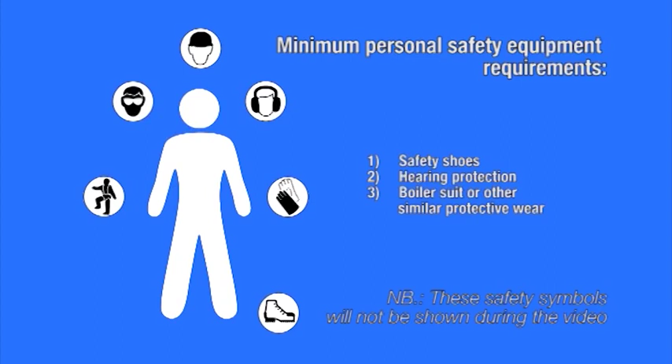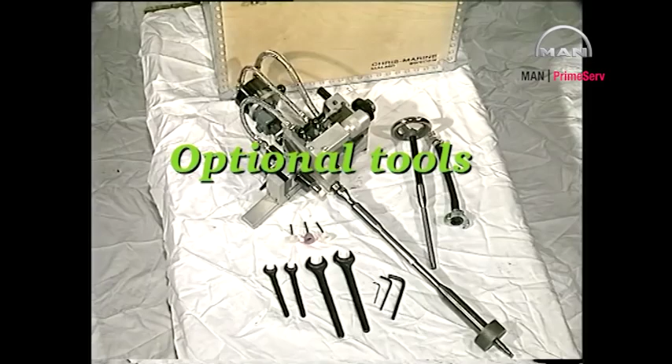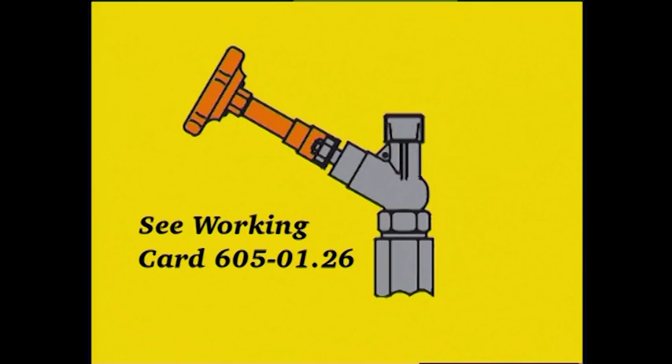Remove the scavenge air sleeve and the safety valve. For instructions regarding the overhauling of the safety valve, please see work card 605/01.25. The procedure for overhauling the indicator valve can be seen on work card 605/01.26.

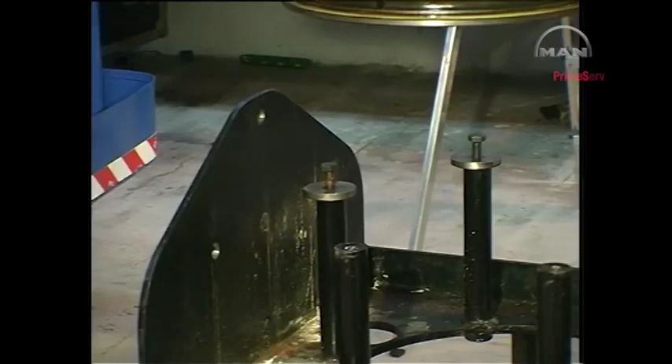Land the cylinder head on the work table. Make sure that the valve spindle supports have been mounted on the underside of the table. Remove the cylinder head lifting tool. Screw the cylinder head firmly to the work table.

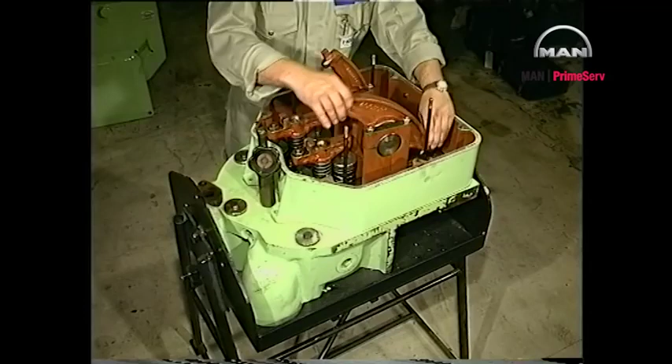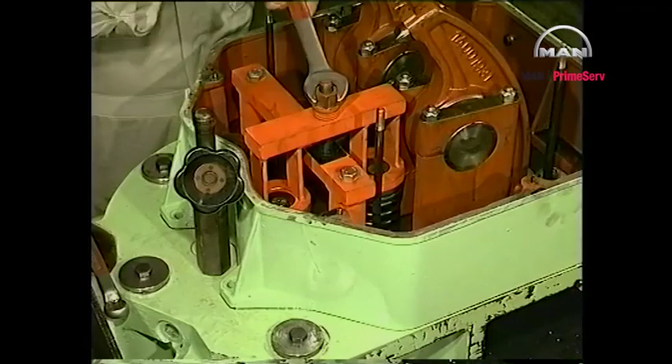Remove and discard the gasket. Remove the valve bridges and mount the tool for compressing the valve springs above either the two inlet valves or the two exhaust valves. Tighten the nut to compress the springs and then remove the cone rings.

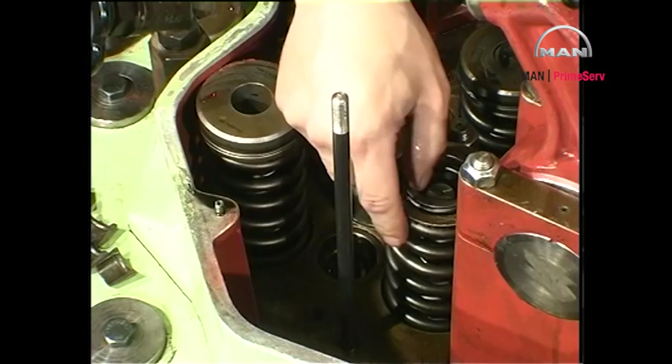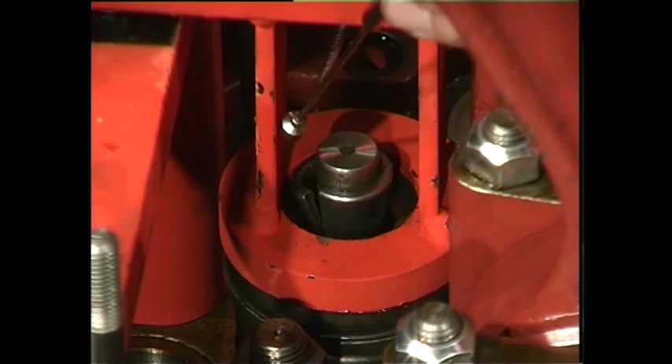Loosen the nut and remove the compressing tool. Remove the valve rotators and the springs. For instructions regarding the inspection and overhaul of the valve rotators, see work card 605/01.15. Remove the cone rings, valve rotators and springs from the other set of valve spindles in the same way.

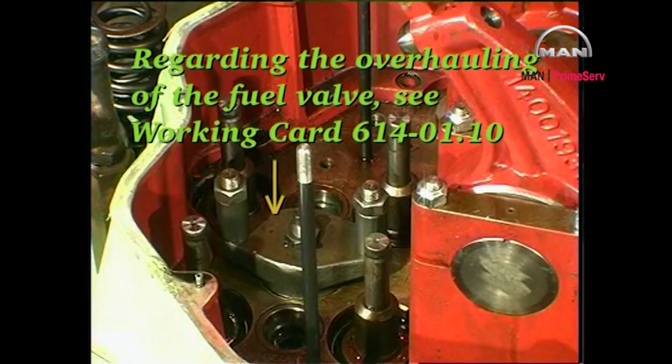Regarding the overhauling of the fuel valve, see work card 614/01.10.

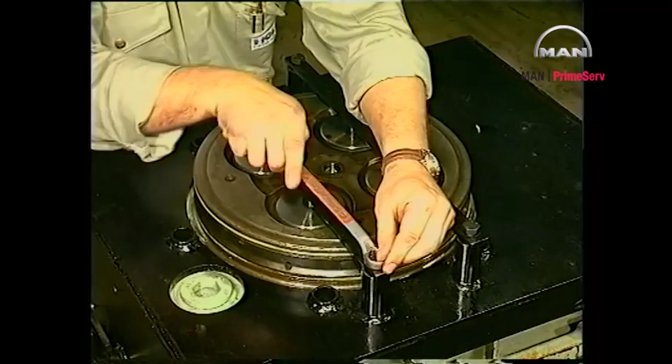Turn the cylinder head upside down and remove the valve spindle supports. To ensure that they can be rematched correctly, provide the spindles and cylinder head with numbers.

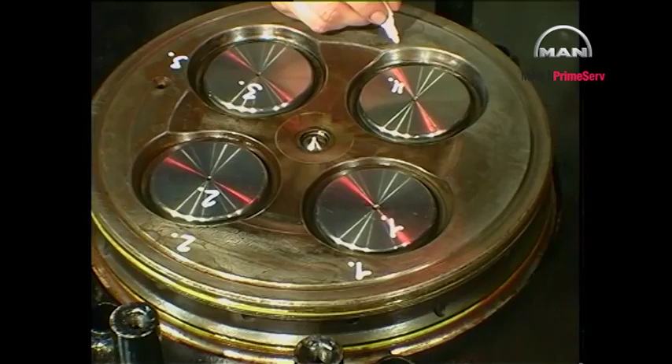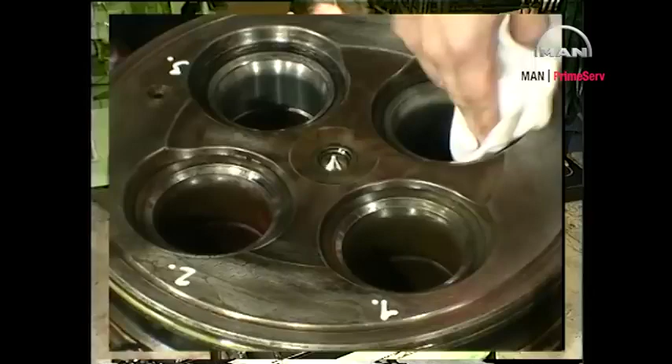Remove the valve spindles. Clean and check the condition of the valve seats and valve spindles. If the seats and spindles are badly burnt, recondition them. See work card 605/01.10.

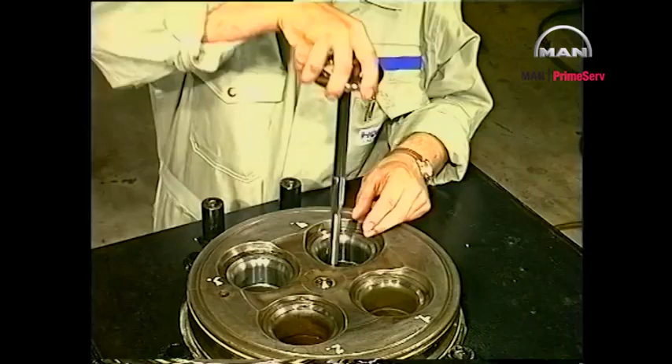Clean the valve guides with the special tool delivered with the grinding machine. Mount the grinding machine and grind the valve seats following the instructions of the grinding machine supplier.

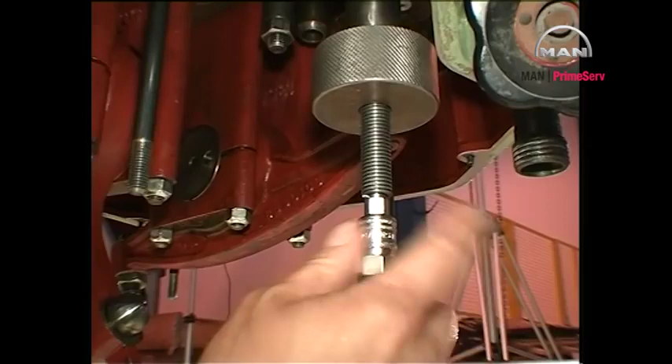Grind the valve spindles in a turning lathe following the instructions of the grinding machine supplier.

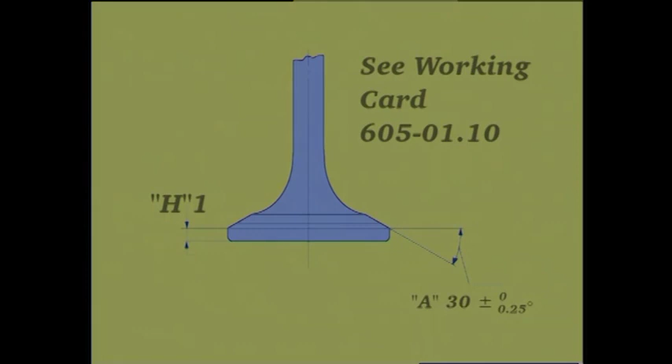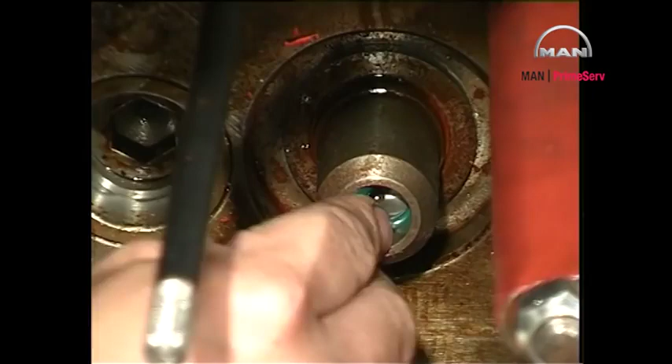Remove and discard the O-rings from the valve guides. To ensure the correct functioning of the valve guides, make sure that the diameters do not exceed the maximum limit. Insert a valve spindle to facilitate the mounting of new O-rings. Insert new O-rings using another spindle to press the O-rings completely into the groove.

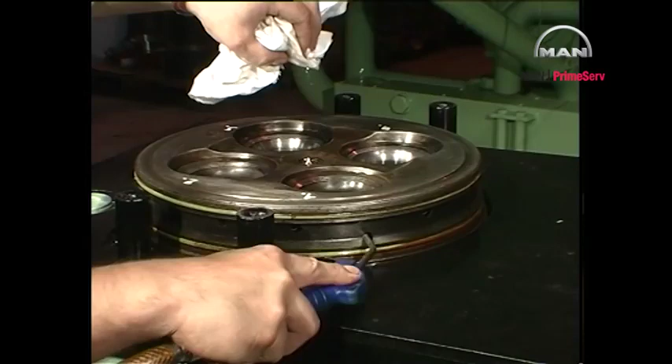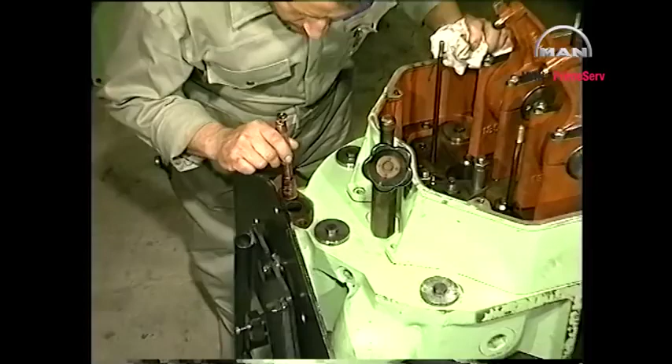Check the cooling water inlet bores and remove any deposits. Turn the cylinder head around and check the cooling water outlet. Pour water into the cooling water outlet and ensure that water flows from all the inlet bores in the bottom of the cylinder head. If necessary, clean and flush the bores.

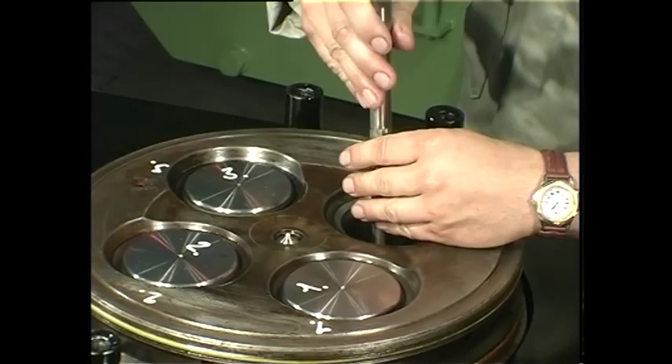Mount the inlet and exhaust valve spindles in the reverse order to the dismounting. Make sure that height H2 does not exceed the maximum limit. Remove the valve spindle supports.

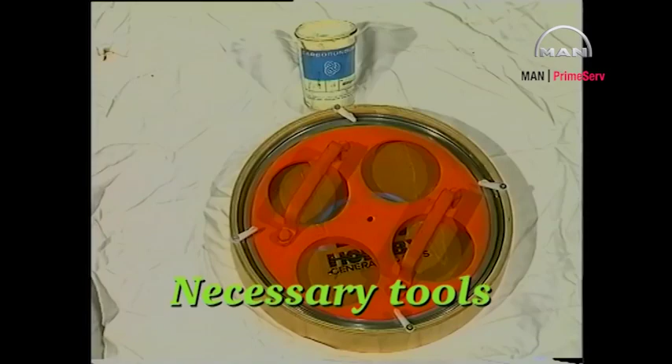Apply grinding paste to the sealing surface of the cylinder head. Move the grinding tool back and forth, lifting it from time to time so that the grinding compound is evenly distributed. After grinding, carefully clean the cylinder head. Measure and record distance Z so that it can be used for reference purposes when remounting the cylinder head.

Mount the valve bridges and remove the securing screws. Mount the cylinder head lifting tool and lift the cylinder head.

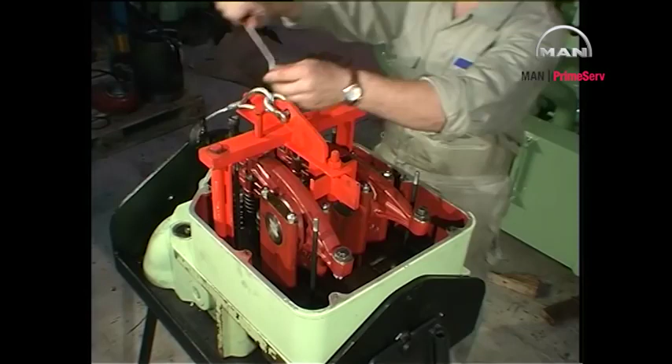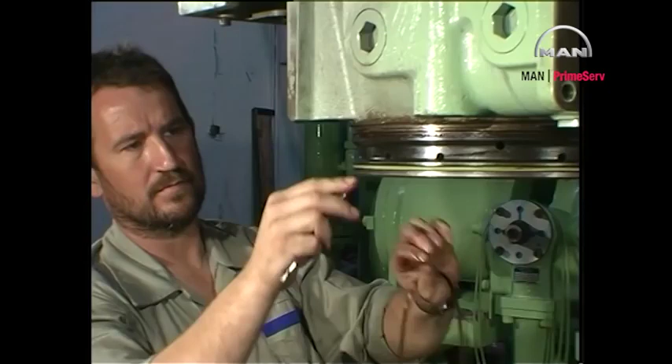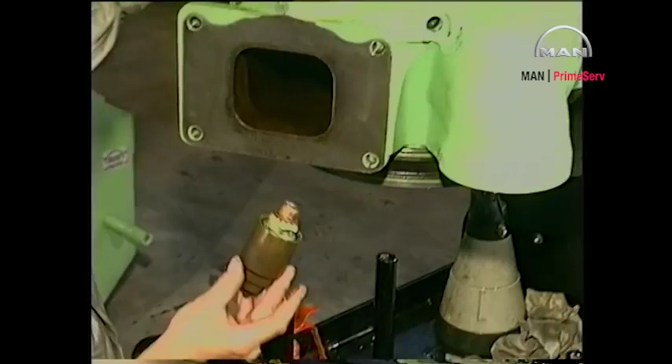Remove and discard the O-rings. Clean the O-ring grooves using emery cloth to remove any deposits. Make sure that the cylinder head sealing surfaces are clean and undamaged. Lubricate new O-rings with oil and mount them in the grooves. Lubricate the safety valve with Molykote or a similar product and screw it into the cylinder head.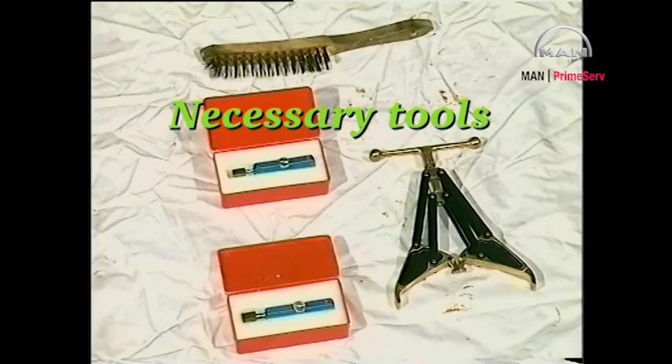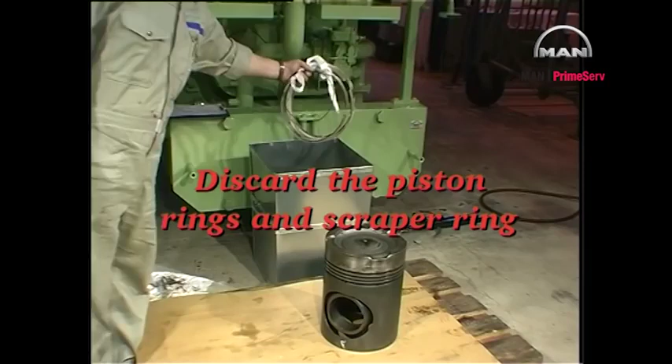Remove and discard the piston rings and the scraper ring. Clean any deposits off the piston. It is recommended that a piece of old piston ring be used to clean the piston ring grooves.

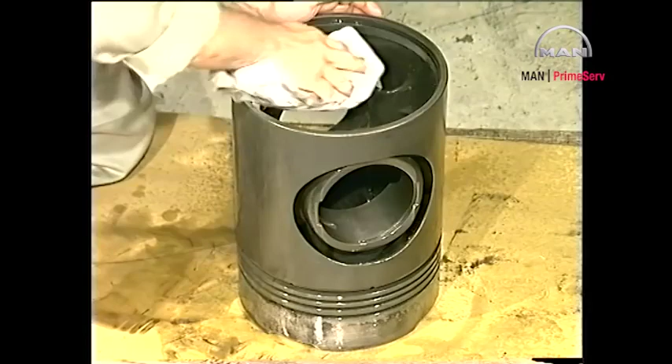Clean off any deposits from the inside of the piston. Check the piston ring grooves and scraper ring groove for wear. The piston must be scrapped if the wear limit line on the testing mandrel is exceeded.

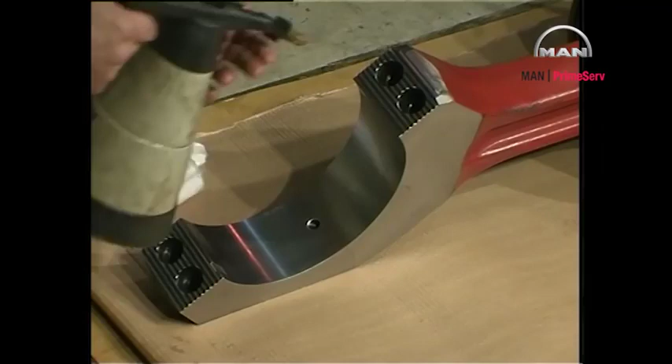Clean all machined surfaces of the connecting rod and bearing cap. Clean the serrated joint faces and threaded holes with a volatile solvent and then blow dry with compressed air. Check the serrated joint faces for wear marks, pitting, cracks, etc.

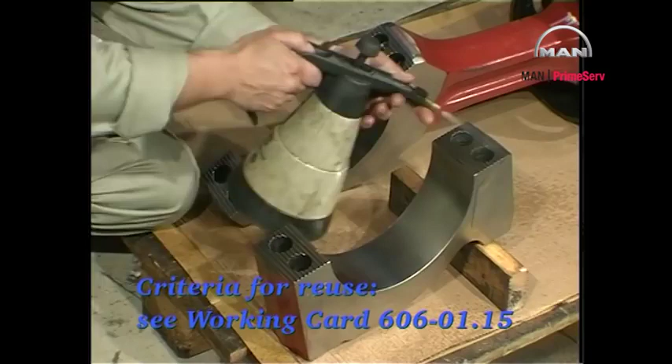Refer to work card 606/01.15 for possible rectification and reuse criteria. Enter observations in the connecting rod inspection report.

Clean the threads of the screws or the studs and check them for seizures. Lubricate the threads with Molykote or a similar product and check that the screws or the studs can be screwed fully home by hand. Take great care that the lubricant does not come into contact with the joint faces of the bearing. Also check for seizures or pitting on the contact surface of the screw heads.

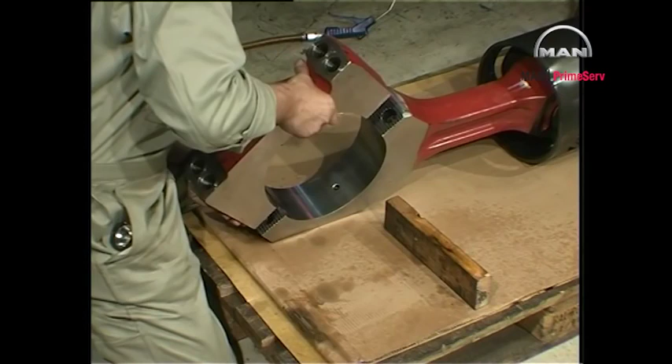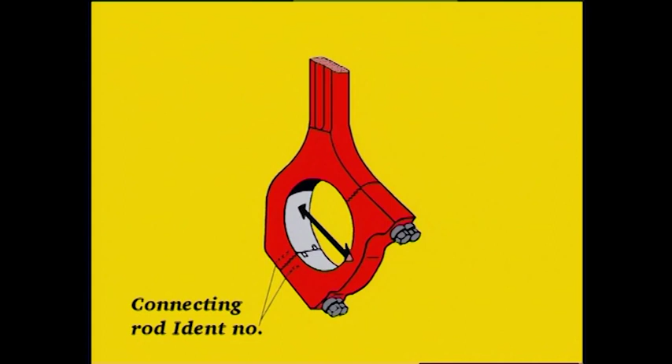Assemble the bearing without bearing shells. Make sure that the identification numbers on the connecting rod and those on the bearing cap are the same. Hand tighten the bearing assembly.

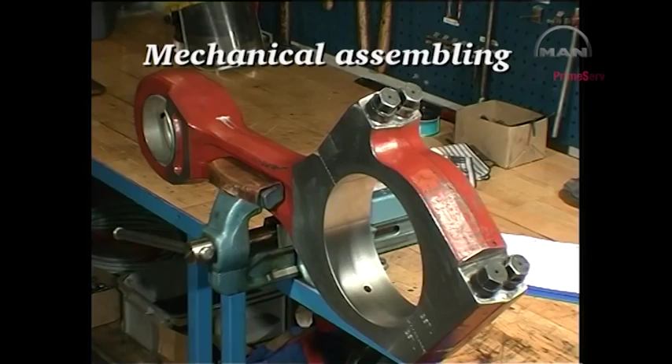The big end bearing must be tightened according to the prescribed tightening procedure before measuring the diameters.

Adjust the torque spanner to 400 Newton meters. Using an initial torque of 400 Newton meters, tighten the screws in the tightening sequence shown.

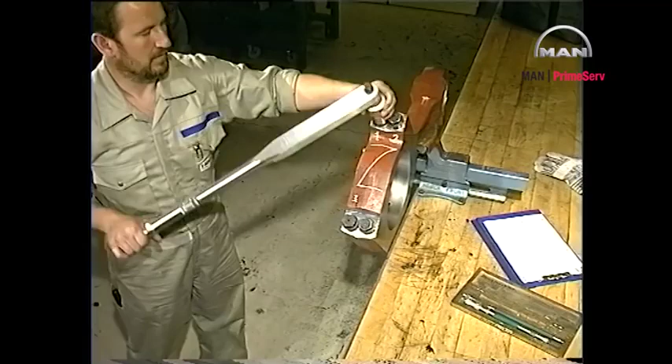Retighten the screws in the same tightening sequence, still using a torque of 400 Newton meters. Make marks on the 4 screws and the connecting rod with a felt-tipped pen.

Tighten the screws in the same tightening sequence through a 60-degree angle until the marks on the screws and those on the connecting rod coincide in the radial direction.

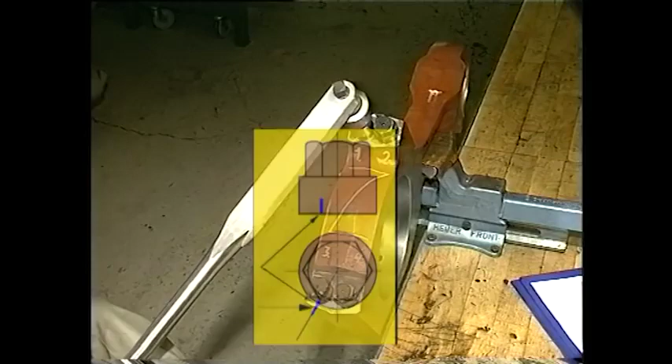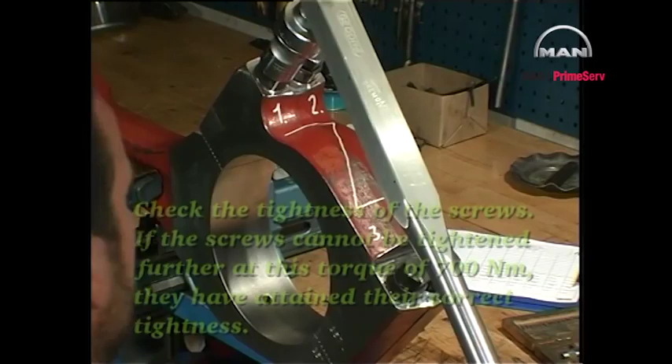Adjust the torque spanner to 700 Newton meters. Check the tightness of the screws. If the screws cannot be tightened further at this torque of 700 Newton meters, they have attained the correct tightness.

The big end bearing must be tightened according to the prescribed tightening procedure before measuring the diameters. Clean all joint faces and mount the hydraulic tools. Make sure that all the parts engage correctly.

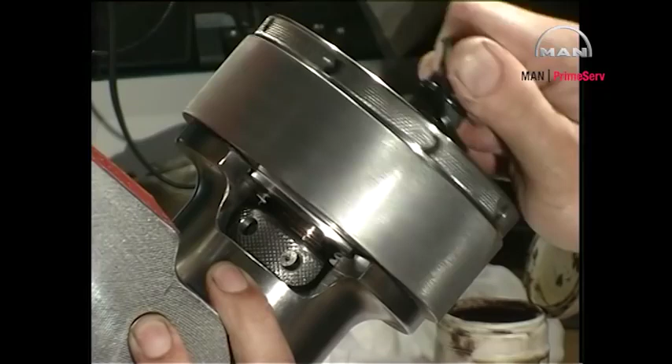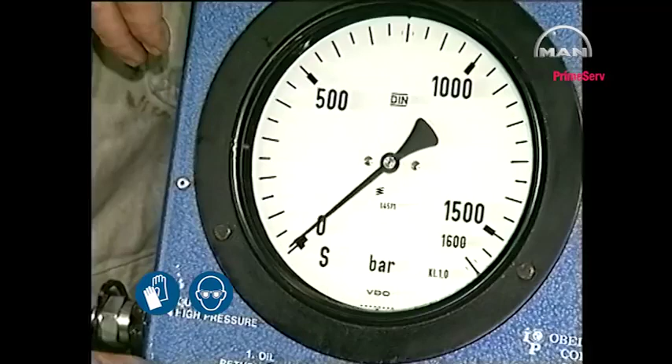Connect the hydraulic tools to the high pressure pump. Vent the system if necessary and increase the oil pressure to the prescribed value.

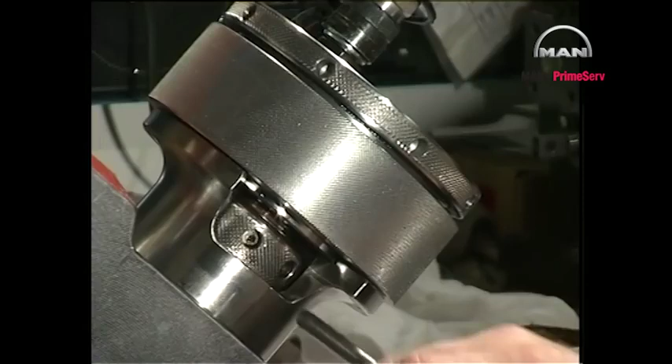Tighten the nuts with a tommy bar. Relieve the system of pressure and remove the hydraulic tools.

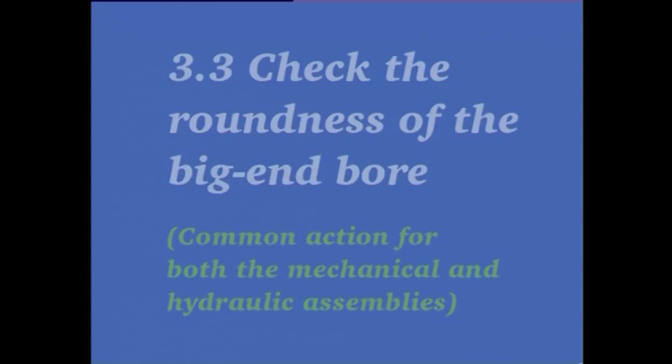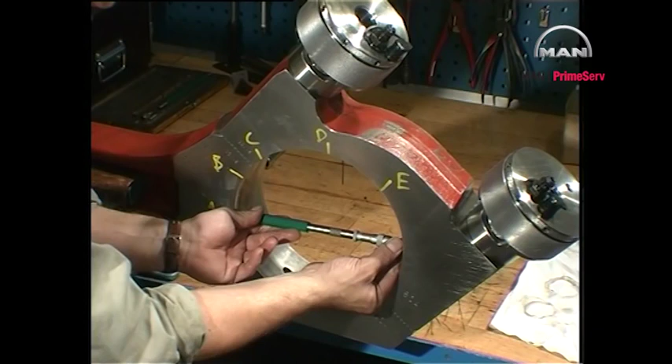Mark the 5 positions, A to E, at which the diameters of the bearing bore are to be measured. Measure the diameters in the middle of the bore and note down the result in the connecting rod inspection report.

The maximum ovalness is defined as being the difference between the largest and smallest diameter measurement. Please refer to page 600.35 for maximum allowable ovalness values.

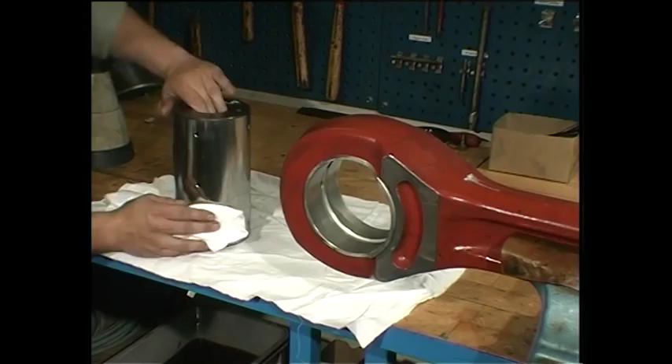Clean and inspect the surfaces of the piston pin and the connecting rod bushing.

Insert the piston pin and measure the clearance between piston pin and connecting rod bushing. The maximum allowable clearance values are given in page 600.35.

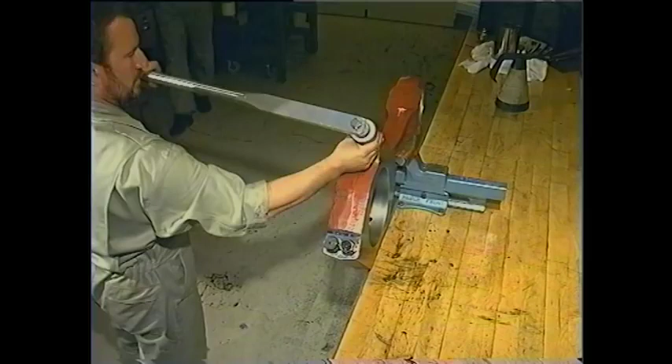Loosen the big end bearing assembly and then hand tighten it.

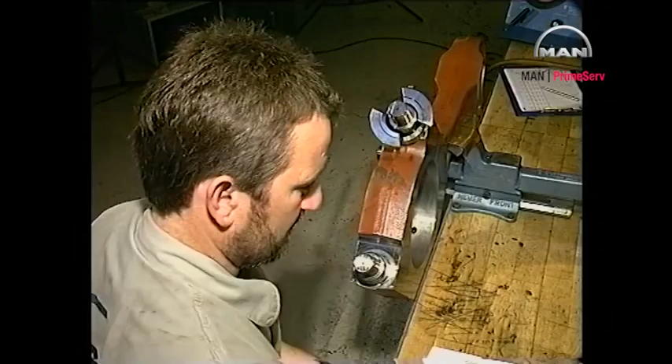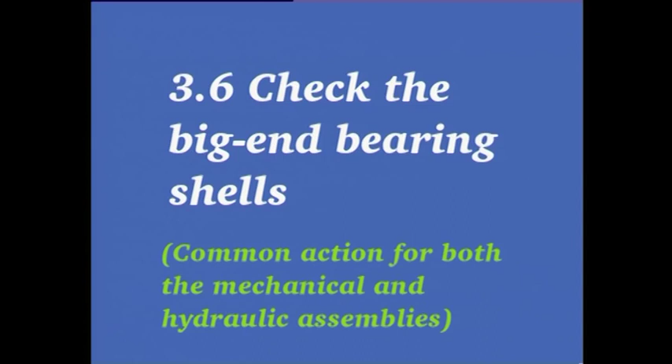Inspect the big end bearing shells through the magnifying tool. For help in evaluating bearing conditions, please refer to work card 606/01.16.

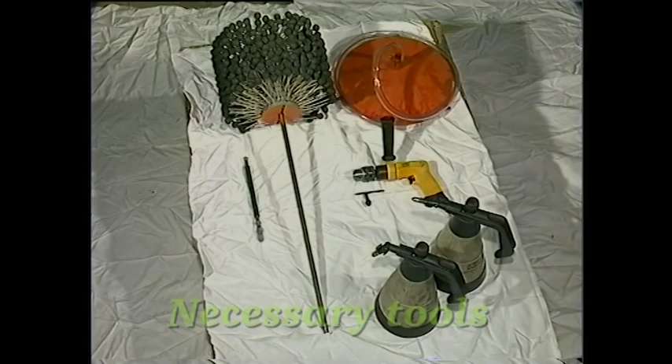Mark the positions in the longitudinal as well as in the transverse directions at which the diameters of the cylinder liner are to be measured.

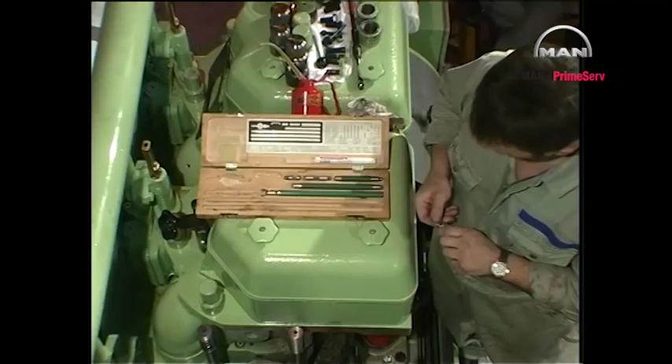Make sure that the measuring tool has approximately the same temperature as the cylinder liner.

Measure the diameters in the longitudinal as well as in the transverse directions and enter the results in the measurement of cylinder liner report. Please refer to page 600.35 for information regarding permissible cylinder liner wear values.

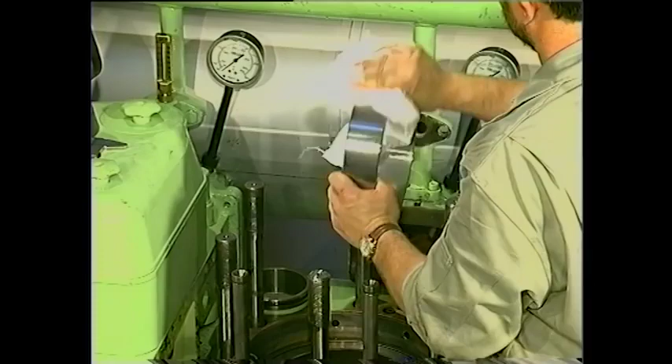If the liner is designed to hold a flame ring, clean and reinstall the used flame ring before honing the liner. Mount the tool for holding down the cylinder liner and remove any deposits or wear ridges from the upper part of the liner.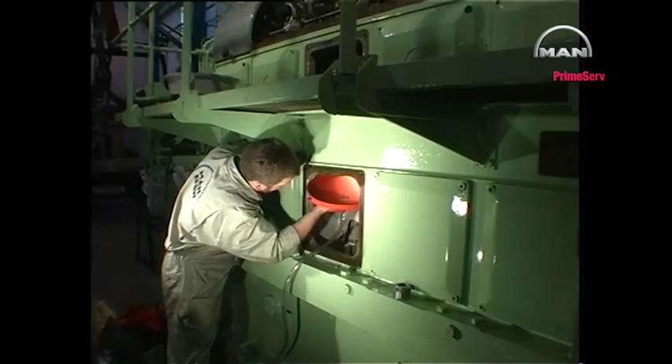Fit the drain funnel to the low end of the liner to prevent contamination of the crankcase during honing.

Lubricate the honing tool and the liner with honing oil or cutting oil.

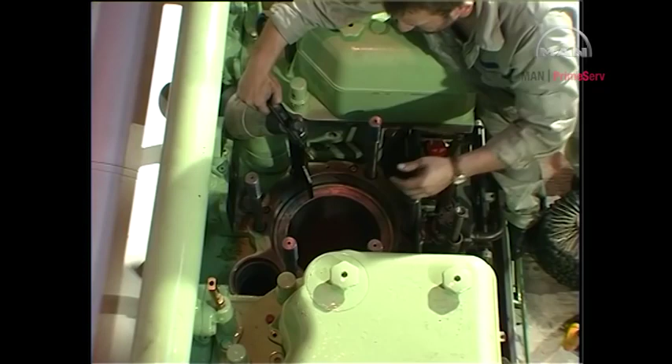Adjust the speed of rotation to 80 to 160 RPM. Use a vertical speed of about 1 meter per second to achieve the required angle between the honing grooves.

During honing, lubricate freely with honing oil or cutting oil. Continue the honing until the cylinder wall is covered by honing grooves and has a slightly matte appearance without sign of glaze.

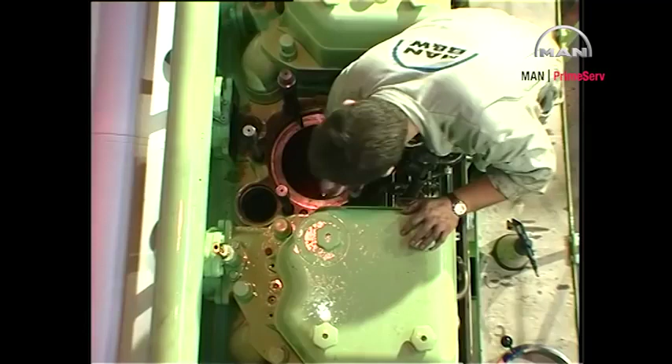Clean the cylinder liner carefully and remove the tool for holding down the cylinder liner. If the liner is designed to hold a flame ring, clean and install a new flame ring.

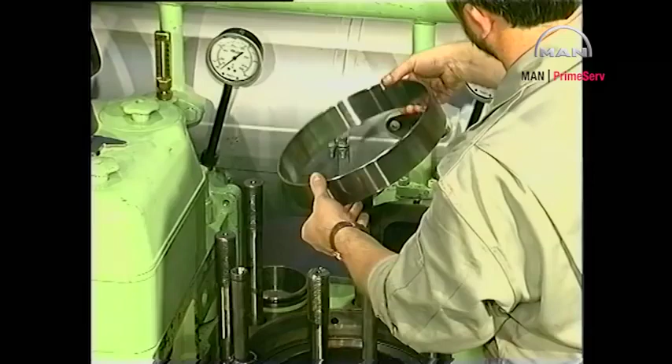Remove and discard the old sealing ring at the top of the cylinder liner.

Apply grinding paste to the grinding tool. Move the grinding tool back and forth, lifting it from time to time to allow the even distribution of the grinding compound.

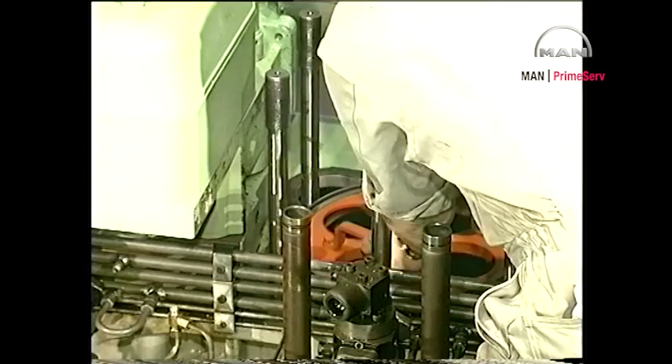After grinding, clean the cylinder liner carefully and mount a new sealing ring. Remove the drain funnel.

Measure and record distance Y. Please refer to measurement Z, which was recorded during the overhaul of the cylinder head.

To ensure that the sealing between the cylinder head and the liner is correct, Y minus Z must be more than 0.5 mm.